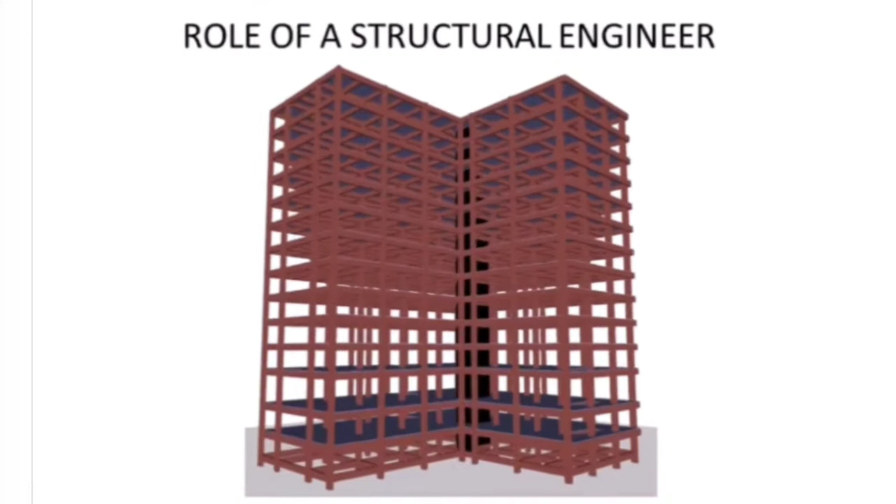Let us discuss the role of a structural engineer. The primary role of a structural engineer is to ensure strength of the members of the building. Different members, based on their position, will have different kinds of forces developed in them.

Basically, the load acting on the members, for example, the dead and live load, is first applied on the slab, and the slab bends. The slab bends and transfers the load onto beams, and beams to columns, and columns to foundation, and foundation to earth. So in this process of distribution of load, certain forces are developed in the members based on their location.

Slabs subjected to bending experience shear force and bending moments. Same is the case with beams. They will experience bending, so they will have bending moments and shear force. Columns are predominantly compression members. They are subjected to compressive force, and due to the frame action there will be bending in the column as well.

So based on its position and location, different members will have different forces developed in them, and the force is the result of a load acting on the building. So load and forces are completely different. By doing analysis, we are applying the load and getting the force developed in the members, and we are going to design the members for these forces developed. The analysis gives you the forces developed in the members.

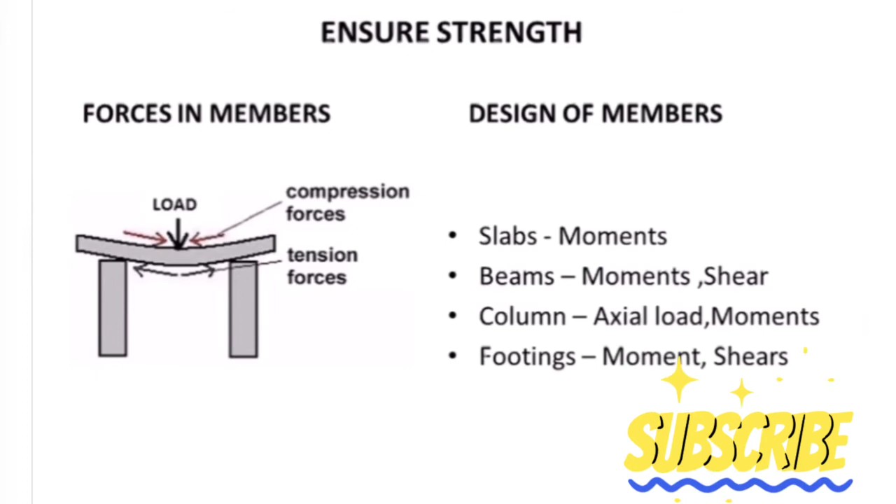So how do we take care of this design? We will elaborately discuss it in the subsequent modules. Currently, our intention is to understand the role, and one primary role is to ensure strength of the building. Now, another important role of a structural engineer is to ensure stability of the building. Say you ensure the strength of all members, and after that the building overturns. So what is the use of ensuring strength? So we need to also ensure that the building is stable.

Now, what do you mean by stability? There are different aspects of stability. One is overturning, and the best method to check for overturning is to ensure there is no negative reaction or uplift in your building. So check the reactions and ensure there are no uplift forces. Generally, a building as a whole may not be subjected to overturning, especially when the building base dimensions are larger. Tall and slender buildings are liable to be subjected to overturning. Otherwise, a building structure as a whole is not that susceptible to overturning.

Also, in case of soil settling, you need to ensure that the soil report is all fine, your building is on really good earth, and you are not having differential settlement chances. So you need to ensure your building foundation is resting on hard earth and the soil report is done. It's a structural engineer's responsibility. If the soil settles on one side of the building, again there is a chance of overturning of the building due to collapse of soil.

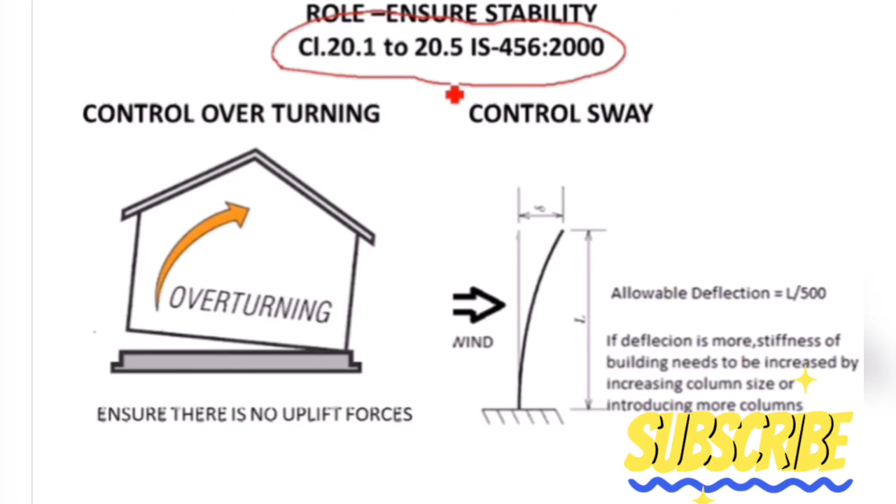Another important aspect of stability is controlling sway. These are mentioned in IS 456 clauses 20.1 to 20.5. So please go through these clauses in IS 456. We have provided a copy of IS 456. Look at these clauses, understand them, and if you need any clarification, you can get back on that. The main control of sway is under wind loads.

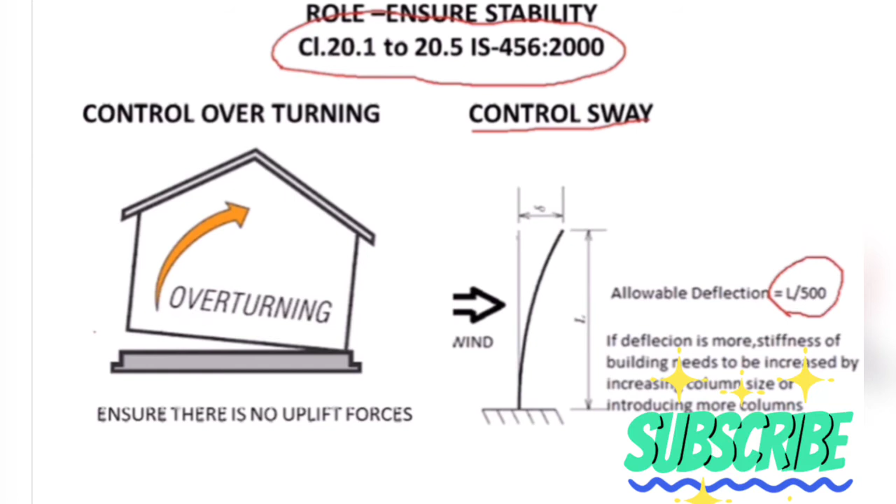Your total deflection of your building: where do you get the total deflection due to lateral load? You can get it from ETABS after your wind load analysis, which we will see later. After analysis, your wind load deflection should be within L by 500, that is, the height of the building by 500. It should not exceed this value. So if your building is, say, 4 floors of 3 meters each, it is 12 meters or 12,000 millimeters.

So your deflection shouldn't be more than 12,000 by 500. So this value, 12,000 by 500, is around 24 millimeters. So your lateral deflection due to wind should not be more than 24 millimeters. If it is more than 24 millimeters, then you are not satisfying the stability requirement.

The sway requirement is not satisfied, and you need to either increase the number of columns or introduce shear walls or reorient your columns, all that, and then ensure your building is deflecting less than h by 500. So this is controlling sway. So mainly under stability you have two conditions to check: overturning and sway.

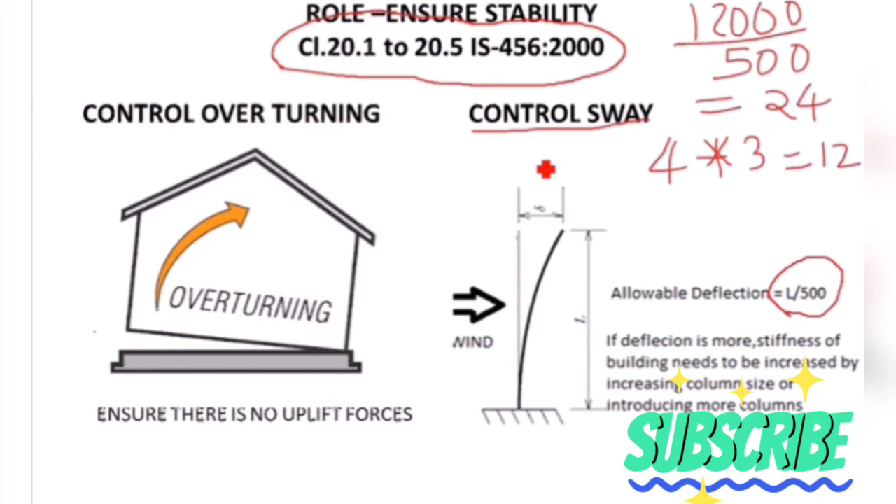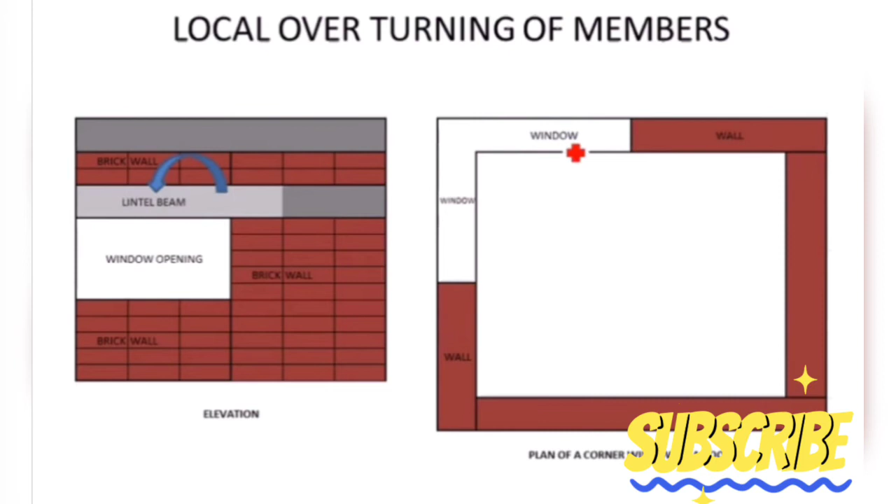Now I will discuss some local chances of overturning. So this is not overturning of a building as a whole, but the local member, say a beam, could overturn. So for example, you have a lintel here. Say you have a room and you have a corner window. So a corner window means a window at the corner of the room.

So if I take a section or elevation, it would look like this. So you will have a lintel beam here, and then there will be brick on top of it, and then you have a slab bearing onto the wall. Say this is not a framed structure, this is a load bearing structure. So these loads are going to come onto this lintel, and this lintel is going to overturn because it's not supported here. Say one of them will be a cantilever and the other one will be supporting on that cantilever.

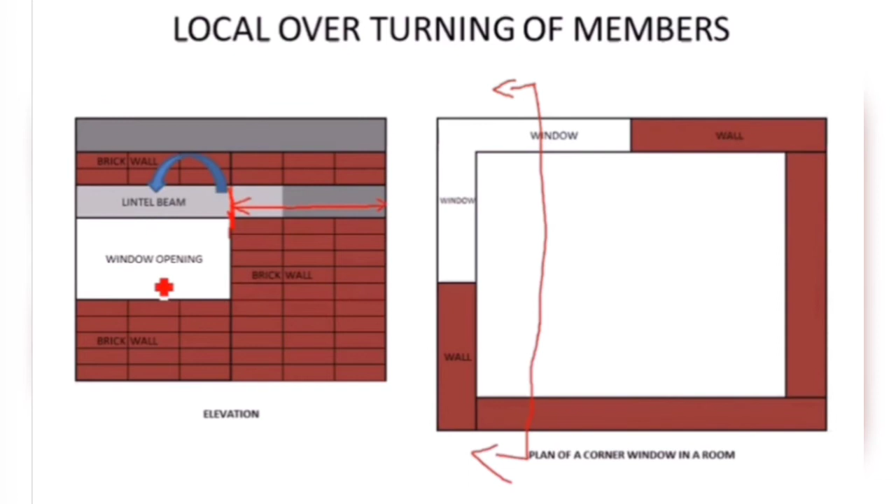So the cantilever one will not be stable because it is supported here, and there is an imbalance force on top of it due to the weight coming on top. So unless you anchor it into a column here, or you give adequate length here to balance the overturning moment, this beam is not stable, it will overturn. So if the lintel span is say 1 meter, you need the back anchorage also sufficiently more than 1 meter to ensure it doesn't overturn.

It will develop an equivalent or more balancing force in the other direction to ensure this weight into this distance is more than this weight into this distance. So if you don't do this, your beam is not stable. So you need to look around for such instabilities in your building. Unless you look around while scheming, you will not capture this. So your scheme should be robust. You should be looking for instabilities like this prior to starting to model. So scheming is very important.

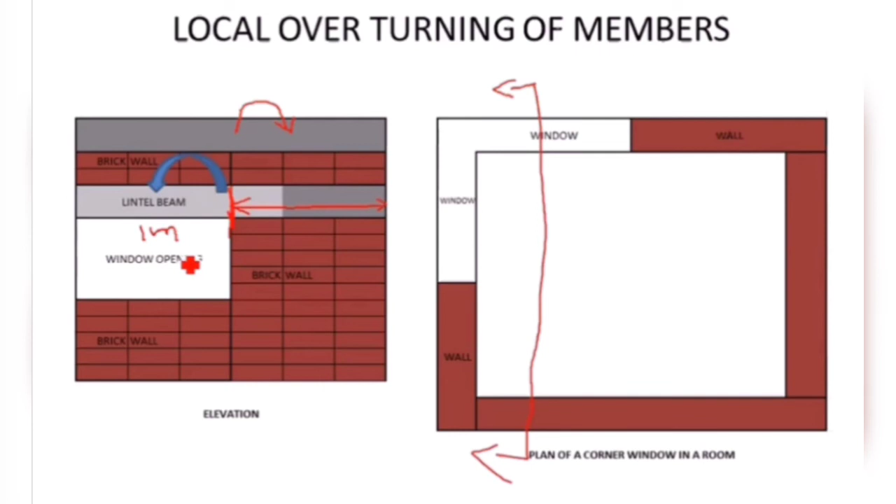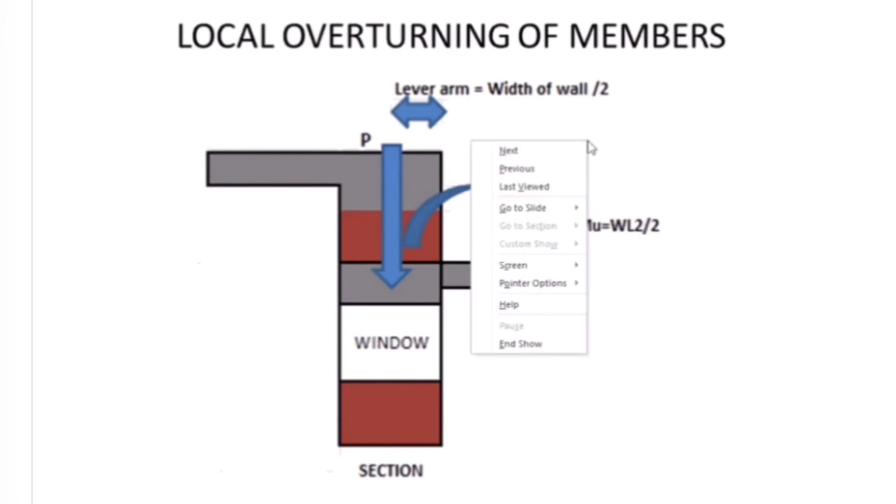So you can either plant a column here and ensure there is a support for this cantilever beam, or give adequate back anchorage so that this lintel is stable. Now similar is the case here. It's a cross section at a window. You have a cantilever projection here, and this cantilever will produce a torsion in this lintel. Even if you have designed this cantilever for the top moment, and even if you have designed this lintel beam for the moment and the load coming on it,

since this is a cut lintel which is resting on top of the wall, and since it is not connected to a column, it is subjected to overturning. Since it is tightly packed between the roof beam and the brick wall here, it is not overturning after construction. But during construction, if you look at the construction sequence, we will first build the frame. The columns, beams, foundations and all that are built first, and then you brick up. So your walls are built next.

Then you will put the formwork for the cantilever and lintel together, and then construct that. And if you remove this formwork prior to putting this wall, that is the fourth step, then this is going to overturn. So you have to put a note in your structural drawing indicating very clearly that the shuttering to the slab can be removed only after construction of the brick wall above.